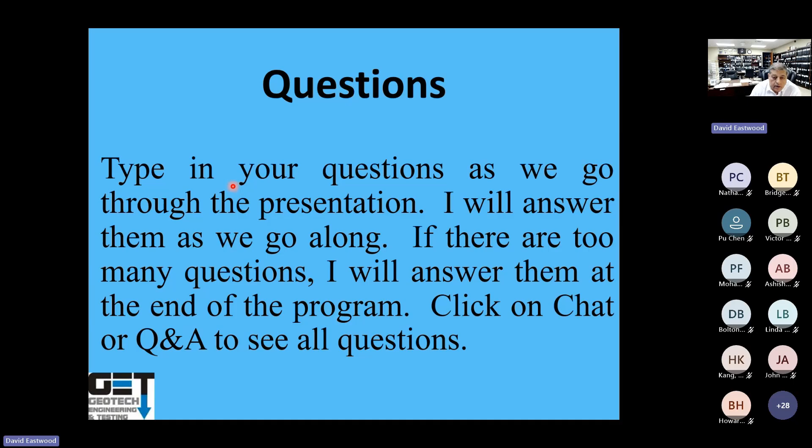This is the Willis site. We did the initial geotechnical for the pool and the rec center. We did recommendations for pool foundations, reviewed the plans and specifications, and did quality control for it. We did site visit, density testing, steel placement, and gunite testing here.

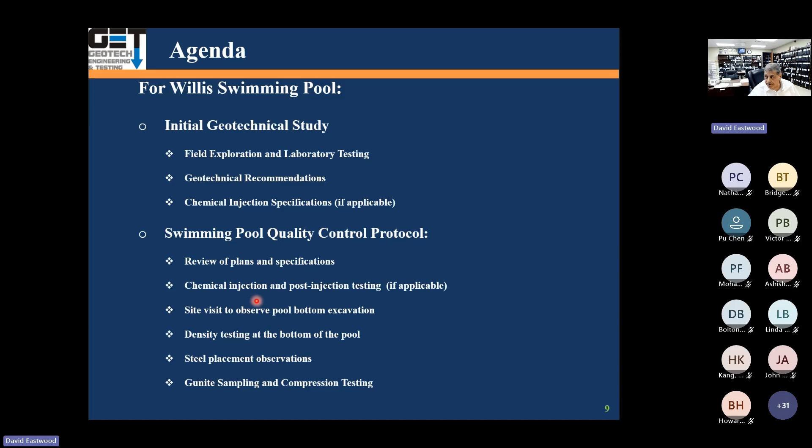There was no chemical injection on this site, but typically, if your soils are expansive, we do chemical injection and monitoring. The project is out there near Conroe.

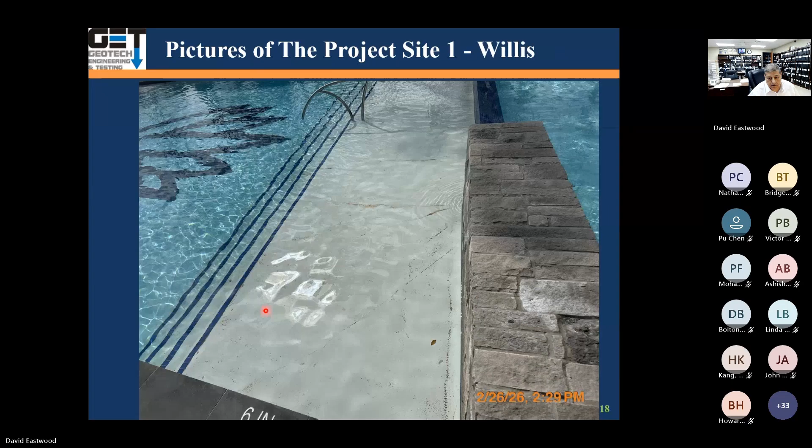Here's some pictures of the site. It's a nice rec center, but you can see cracks here, cracks in it, cracks right there.

So the pool has many cracks in the gunite. You can see them through the plaster. Here are the cracks.

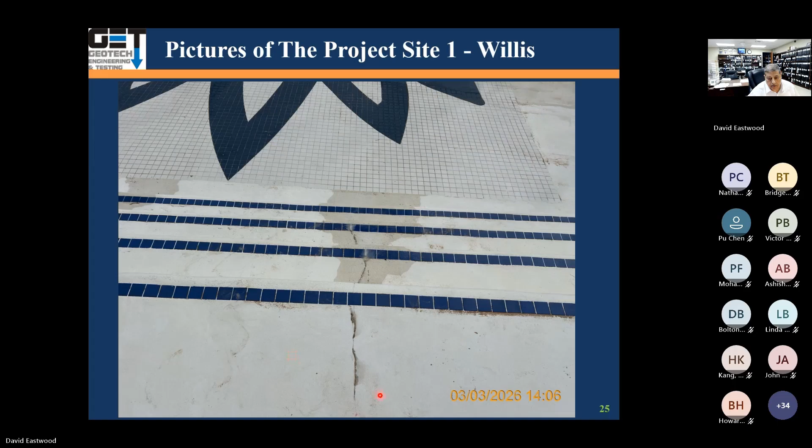So they had to empty the pool to check out the place, and they had to put these little holes in it to relieve the hydrostatic pressure at the bottom of the pool to reduce potential for uplift.

Geotechnical study, project site 1. We did the geotechnical study for this rec center and the pool. We checked the site conditions, did the plan of borings, and developed soil stratigraphy, groundwater table, and whether or not soils are expansive.

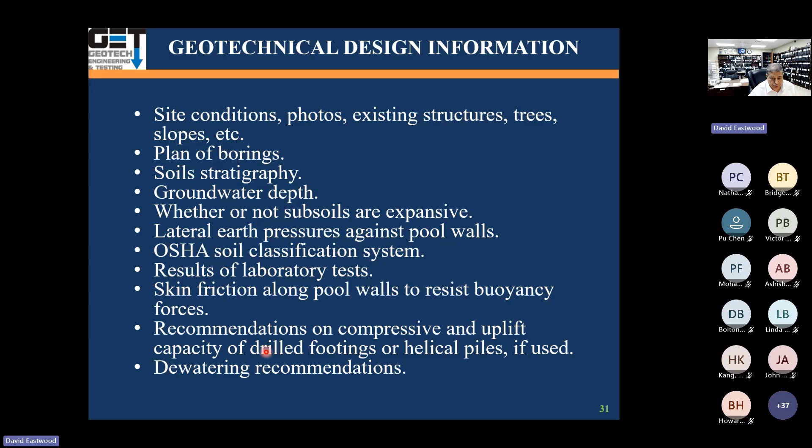We did lateral pressures for the pool, OSHA soil classifications for excavations, laboratory testing, skin friction along the pool, recommendation of compressive and uplift capacity of drill piers if they used it, dewatering recommendations, PVR at the deep end and shallow end - that's very important.

Edge moisture distance - how far moisture from the pool extends out, which affects shrink-swell problems - depth of movement active zone, depth of root fiber, whether there are trees near the pool, tree trunk diameters and species, recommendations on uplift capacities of the pool, recommendation on whether the excavated soils can be used as fill, consideration and maintenance programs, trees and drainage.

So these are some of the things that we looked at on this project.

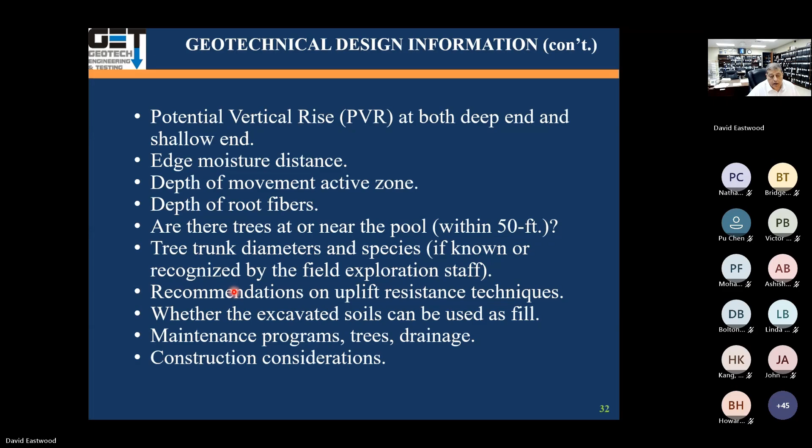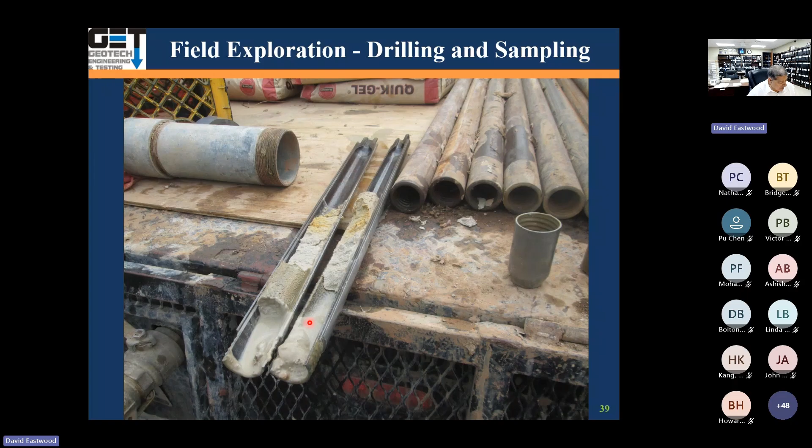The typical soils that come out, we extrude from the site. If the soils are sandy, that's a split spoon sampler. We test the soils for how strong they are based on the SPT values, standard penetration test.

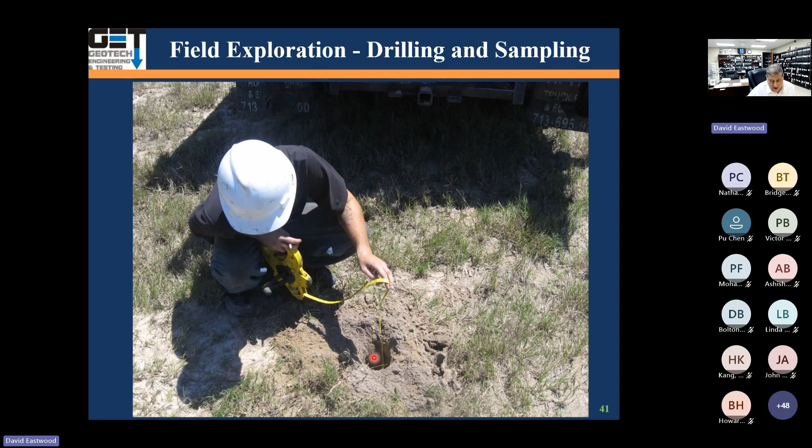We measure the water level with the tape measure with the weight at the end of it. We throw it in the hole. When it hits water, it tells us it goes plumb, so we know the water depth. It's not very accurate because water level changes all the time. If I go out there and check the water level right now, it's going to be deep. If they're going to build a pool in February, the water table is going to be shallow. So it's just an indication, not very accurate. Lab testing, we do the standard lab testing.

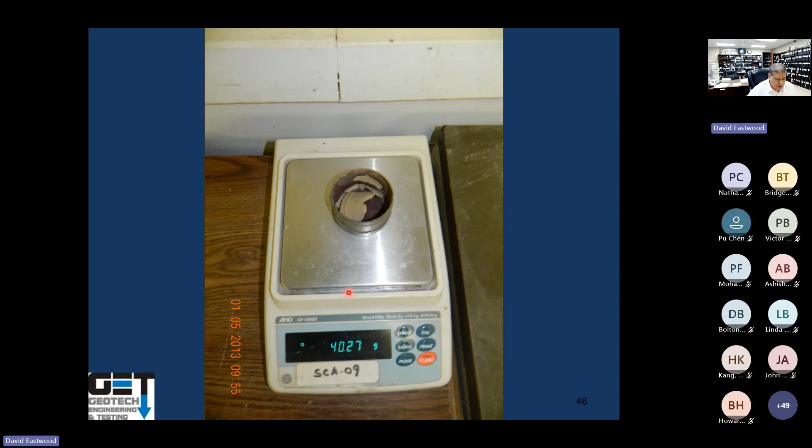I'll talk about them for a minute. It's a liquid limit test. In this test, we take the soil sample, add a lot of water to it until it becomes a liquid. We get a spatula, put a piece of it here, spread it, and cut a groove through it, then turn the handle 20 to 30 times. Once the groove comes together, we get a sample of the soil and weigh it to get the wet weight, then put it in the oven and dry it up to find out how much water is in the soil for it to behave liquid.

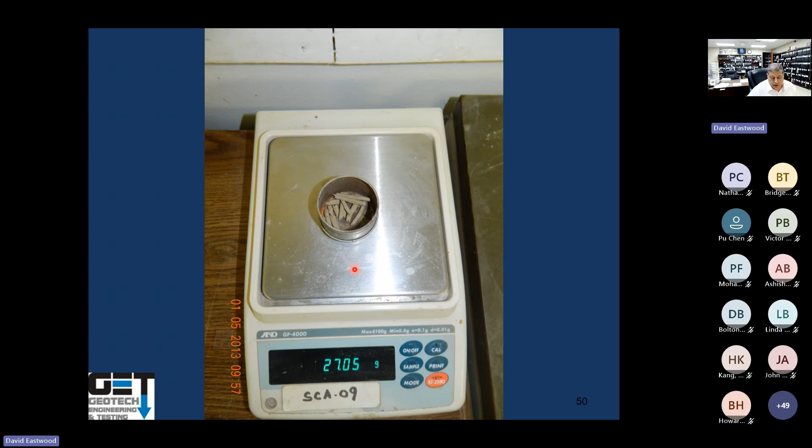Then we also run plastic limit tests. In this test, we take the soil sample and roll it to 1/8 of an inch to find out how much moisture is in the soil for it to behave semi-plastic. We get the wet weight of the soil, then put it in the oven and dry it up to get the dry weight, and subtract the dry weight from the wet weight to find out how much moisture is in the soil for it to behave semi-plastic. The difference between liquid and plastic limit moisture contents is called plasticity index, or PI.

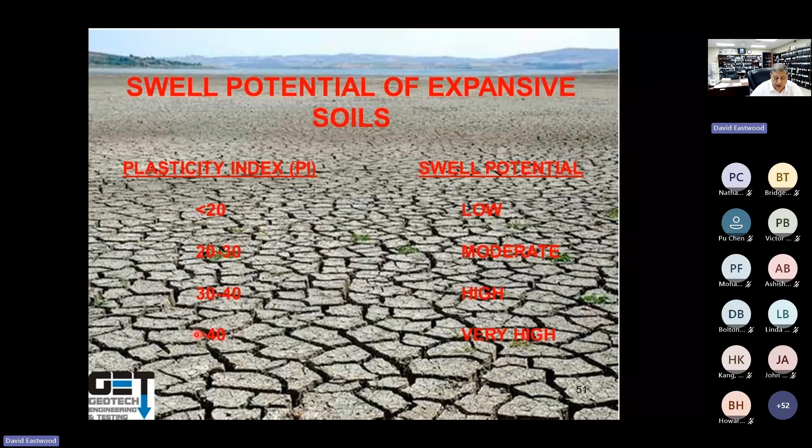If your PI is less than 20, you've got low swell potential. 20 to 30 is moderately expansive. 30 to 40 is highly expansive. Above 40 is very high. So places like Willis, you've got sandy soil, so it's got low swell potential. Places like Texas City have fat clays with PIs greater than 40, very highly expansive.

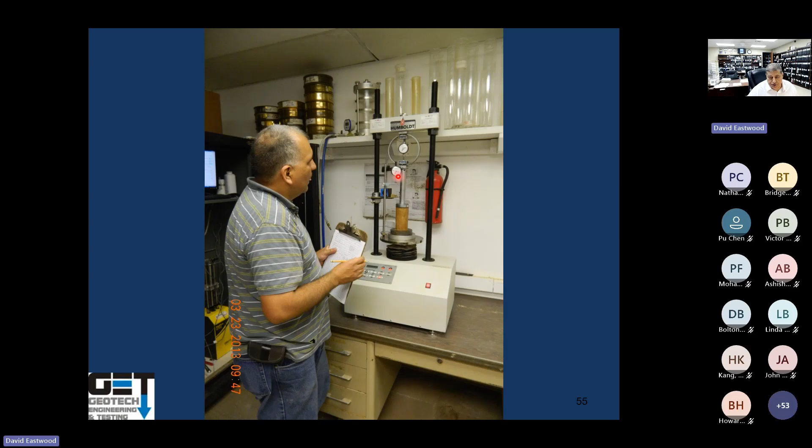A couple other tests we run are called hand penetrometer and torvane. With the hand penetrometer, you take the soil sample and push this thing in there, and you can read what kind of strength you have. With the torvane, you put it at the end of the sample, measure the torsion, and read what kind of strength it has. You also run an unconfined compression test, where you put the sample in here, and this is a proving ring. It deflects, you shear it, and see how much load the soil can carry.

That's important for design of the excavation for the pool, and if you've got any buildings out there, like a rec center, for the foundations, to know how much load it can carry. So this is the Willis site, boring logs from 0 to 6 feet. We had sand. Below that, they had lean clay with a PI of 22. Below 13 feet, we had fat clay. So that's not a bad site.

It's got sandy soils: silty sand 0 to 6 feet, 6 to 13 feet lean clay, 13 to 25 feet fat clay. PIs ranging about 22 here. So their soils are really loose near the surface. The silty sands are loose.

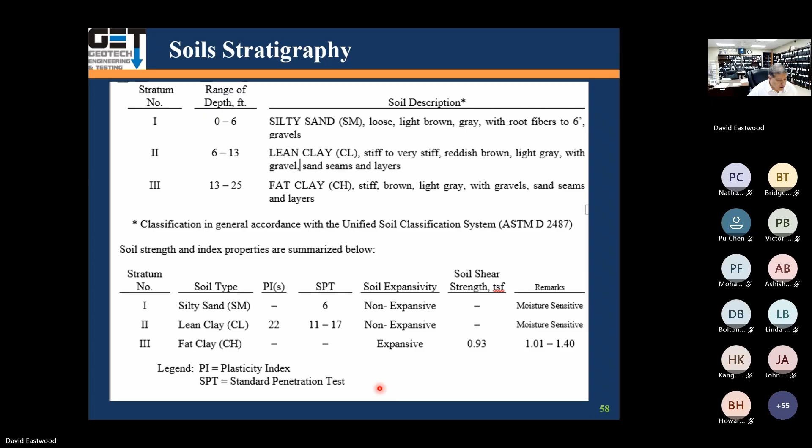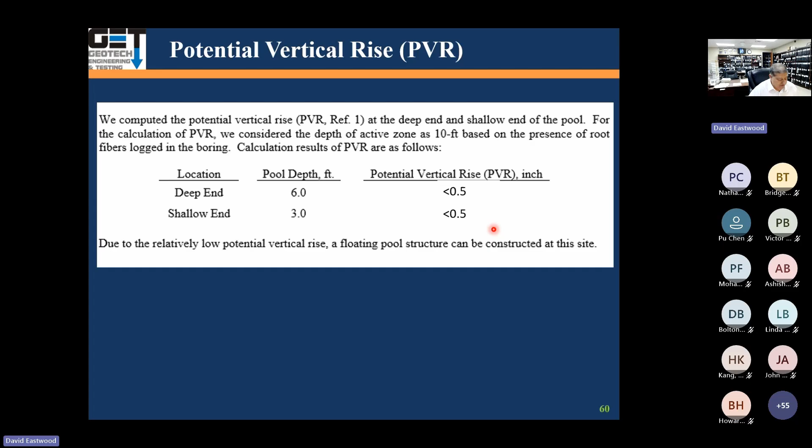Potential vertical rise, or PVR. Whenever you do pools, you always check the PVR on that site. It's expressed in inches and estimates how much swell, or heave, you're going to experience for a specific location. At this site, at the deep end of the pool, assuming a 6-foot pool depth, the PVR was less than half an inch. At the shallow end, 3 feet deep, also less than half an inch. Allowable pool movement is 0.5 inches. That's because after half an inch of pool movement, kids playing around the pool could trip over and hurt themselves, so we don't want the pool to move more than half an inch.

Site number 1, we reviewed the specifications, plans and specifications. We did a site visit to check the bottom of the excavation of the pool. We ran the density test after compaction of the bottom of the pool. We checked the steel placement and we tested gunite.

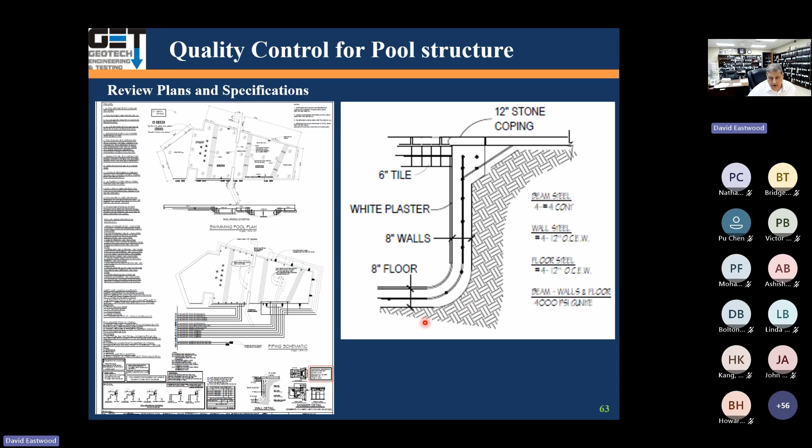There's a typical pool construction here. Got 8-inch thick gunite, and you got steel in there. Soils are sandy and lean clay, so there's no soil treatment required as long as the bottom is properly compacted. Gunite, in this case, is supposed to be designed for 4,000 psi.

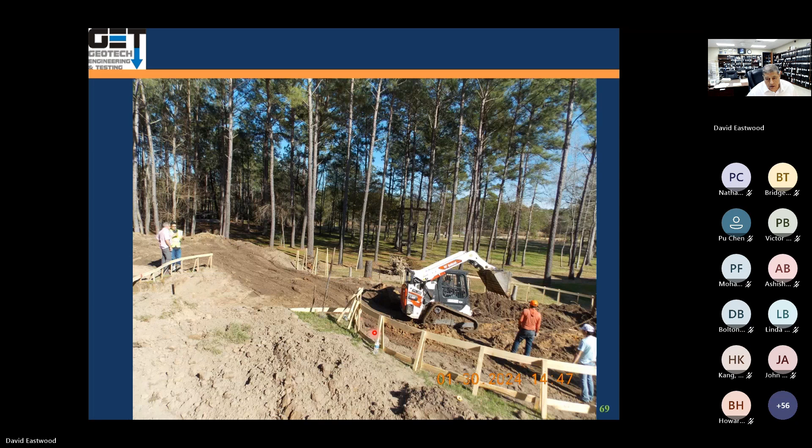Construction, they start excavating the pool. They just get a backhoe or something else. They just start excavating. This is the bottom. Doing the construction.

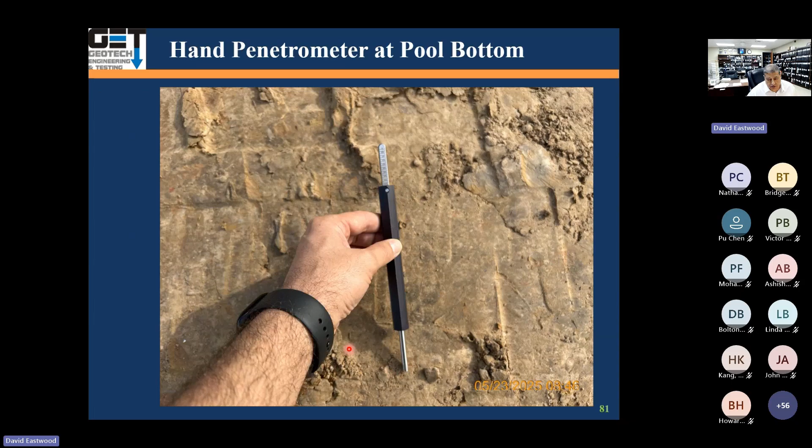We also ran hand penetrometer tests at the bottom of the pool. That's a hand penetrometer, and push it into the soil, get a strength. We usually like to have a strength of at least 2.0 TSF. On the hand penetrometer, it was 2.7 TSF, so the soils at the bottom of the pool were strong.

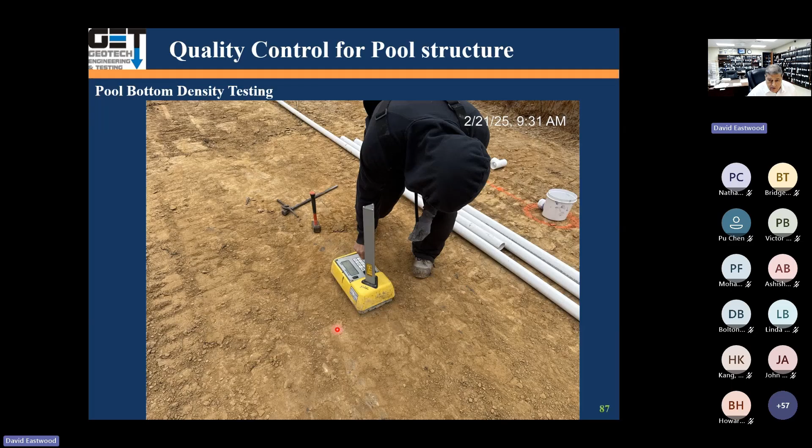So we run density tests. We check a proctor test on the bottom of the soil at the pool, to see what kind of proctor it has. That's the relationship between density and moisture of the soil. The dry maximum density here was 113.8. Optimal moisture was 15. These are the compaction tests at the bottom of the pool.

They ran it at 4 locations, and densities ran from 99.7 to 96%. Required compaction was 95% standard, so densities passed.

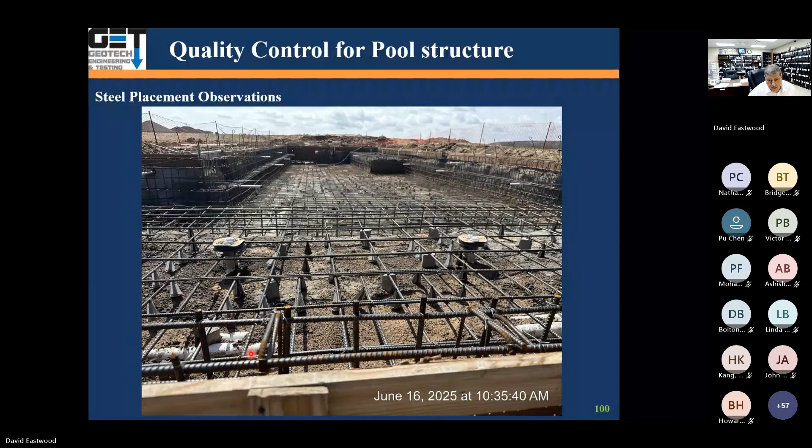Steel observations, we checked the steel placement for the bottom of the pool. They had these blocks in here. We told them to remove it and put plastic chairs. So we wanted the plastic chairs, not the blocks. We checked the steel placement, the size of the steel, the spacing, to make sure it meets project specifications.

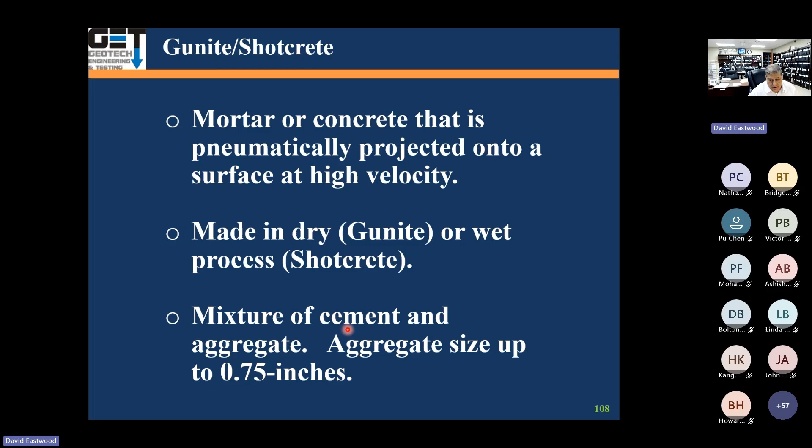Then we check the gunite. Of course, gunite is a mortar or concrete that's pneumatically projected onto a surface at high velocity. If it's mixed dry, it's called gunite; if it's wet mixed, pre-mixed, it's called shotcrete. It's a mixture of cement and aggregate, with aggregate size not greater than 0.75 inches.

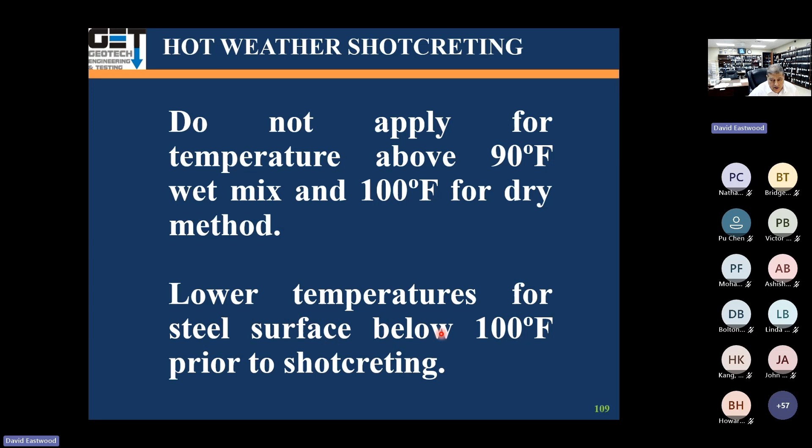Do not apply if the ambient temperature is above 90 degrees for wet mix, or 100 degrees for the dry method. Lower temperatures for the steel surface below 100 degrees before shooting gunite. Gunite may proceed if the ambient temperature is 40 degrees and rising, or 50 degrees for latex modified shotcrete. Do not start if the temperature is 40 degrees and falling. Shotcrete materials' temperature should not be less than 50 degrees or higher than 90. Shotcrete should not be placed against frozen surfaces. These are some general guidelines.

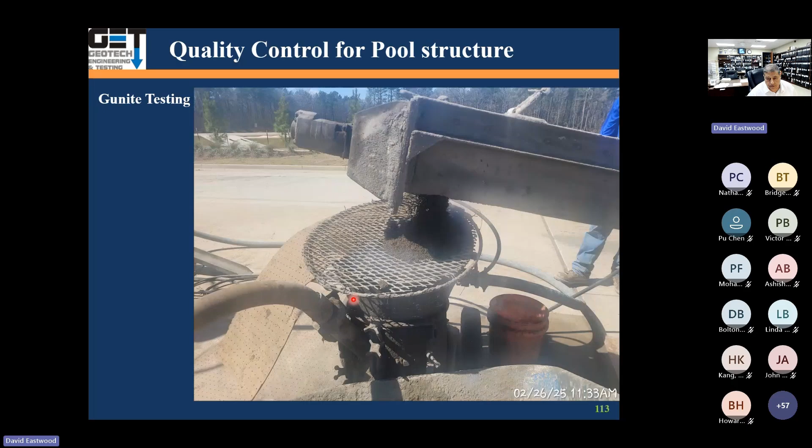That's the truck that mixes the gunite out there. They've got the cement and the aggregates. That's the gunite truck, see the material coming out. You've got a hose that comes in, and they start shooting it. You can see them shooting the gunite. Ideally, you want to shoot it at a 90-degree angle, not at a 45-degree angle.

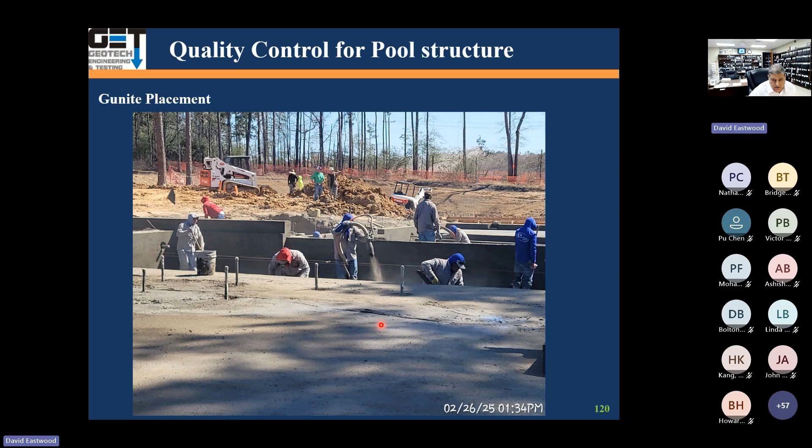Here they're shooting the gunite. Gunite panel preparation - we want to test the gunite. So what we did was get a wood panel, 3 feet by 3 feet, or 3 feet by 2 feet. ASTM has a standard on it. We shoot the gunite into it and let it cure for 14 days.

Gunite panels are equivalent to concrete cylinders used to evaluate compressive strength, of the concrete material, because shotcrete cannot be shot into a closed cylinder form - the shotcrete is shot into an open-faced form instead. Cores are taken from the panels and tested at appropriate age. Usually we test them at 14 days and 28 days, sometimes at 7 days. We go out there and core them, like 2-3 days after.

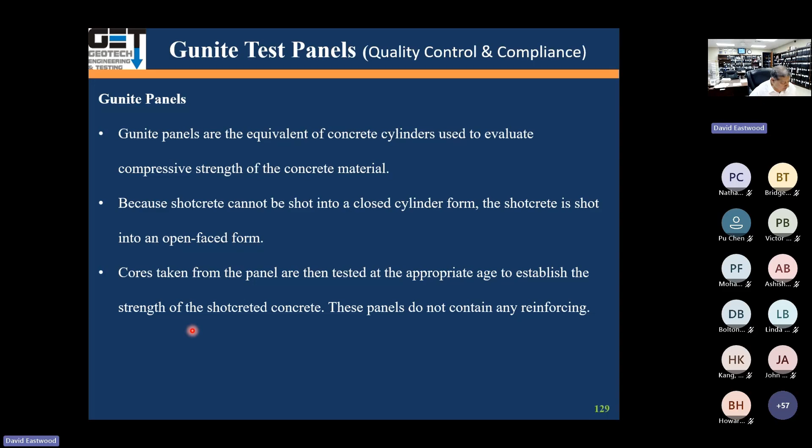No reinforcing should be in the panels. ASTM C1140 is the standard practice for preparing and testing specimens from shotcrete panels. It provides the testing requirements. The panels are samples of shotcrete sprayed into a form under controlled conditions.

Standard cores are later taken from the panels using a gunite panel coring machine. You go out there and start coring the panels, typically after 14 days. ASTM C1140 talks about how to do these things.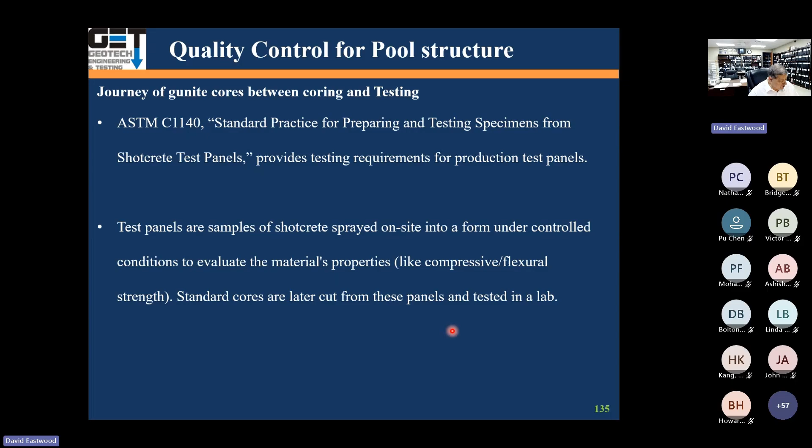Test panels of shotcrete are spread into a form, and they indicate how we go core them and take them to the lab. When we take them to the lab, we cut the ends of the core so that they have nice, clean ends, not jagged.

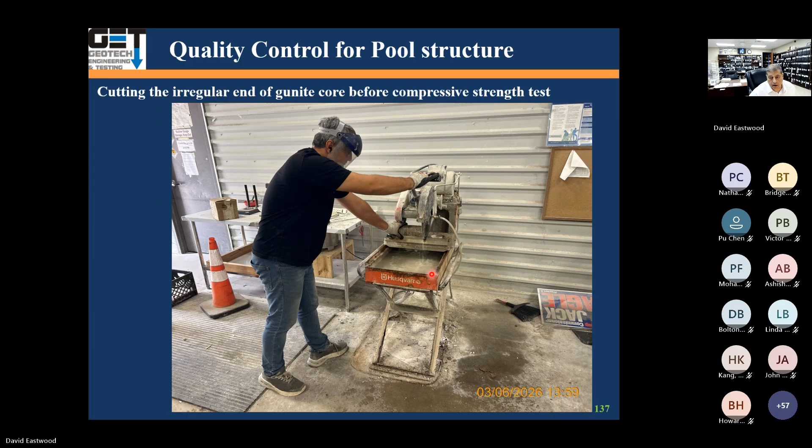You put them in a plastic bag and place them in the curing room for 5 days for basic moisture conditioning, to stabilize the moisture gradient throughout the cores. Then we test them after the 5 days of curing. You measure the cores, get their dimensions, run densities on them, cap them, put them in a machine, and break them.

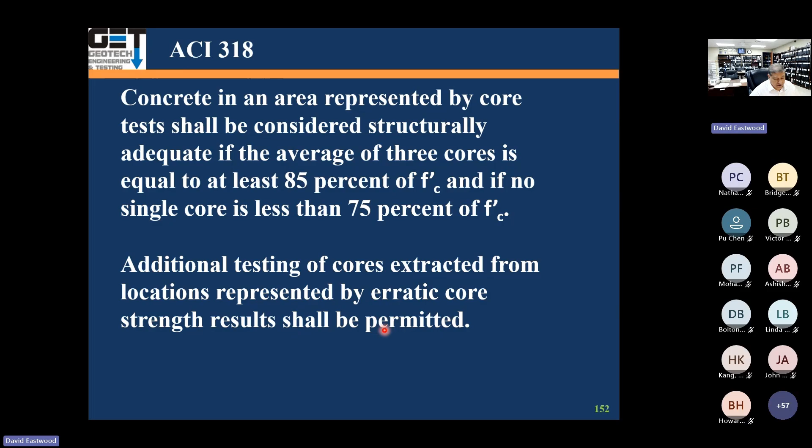The concrete area is represented by the cores, and that's how we determine if the cores passed. Typically for 3 cores, the average core strength should not be below 85% of the design strength of 4,000 psi, and no single core should drop below 75% of F'C. If it does, it typically fails or additional testing is required. For 4,000 psi gunite, 75% of F'C is 3,000 psi, and 85% of F'C is 3,400 psi.

When we read the testing at 7 days, we got strengths of 3,600 and 3,550 psi; at 28 days we got 3,888. So the gunite passes the strength requirement. It's not 4,000 psi, but it still passes.

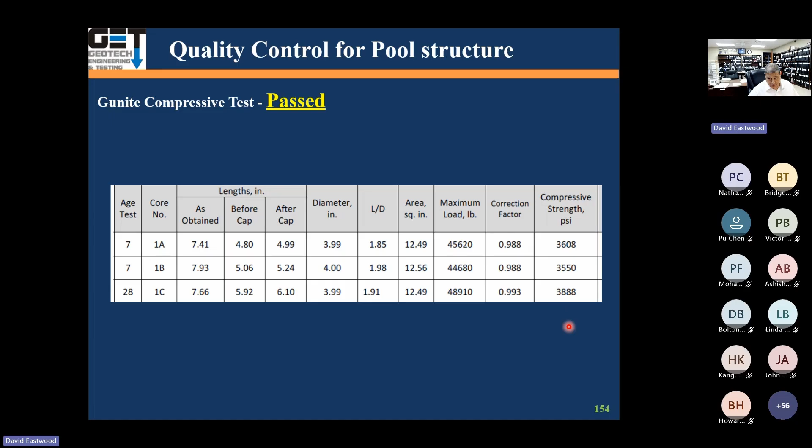When you put the pool together and shoot the gunite, you're supposed to go out there and cure it with moisture conditioning — add water to the surface, put burlap on it or something — to cure it for at least 14 days, maybe 28 days even better.

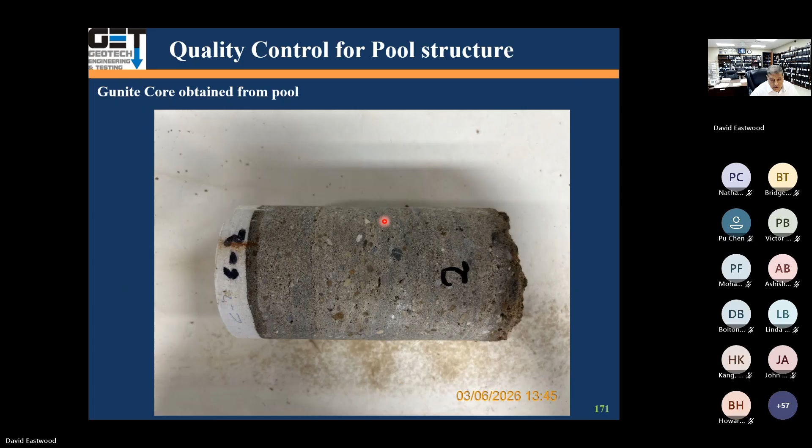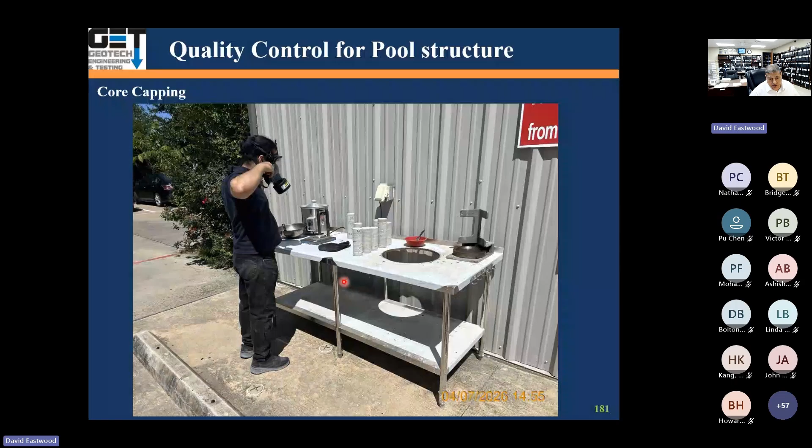We cut the ends of the cores, put them in the curing room for 5 days, measured the dimensions, capped them, and broke them in the compression machine. We got test results of 1,600, 1,500, 1,600, and 1,500 psi.

It was supposed to be 4,000 psi, and they all failed. Most of the reason why it failed was the large amount of voids in it, probably due to the way the gunite was applied. They had voids in it, and the mix couldn't have developed the 4,000 psi strength it was supposed to have.

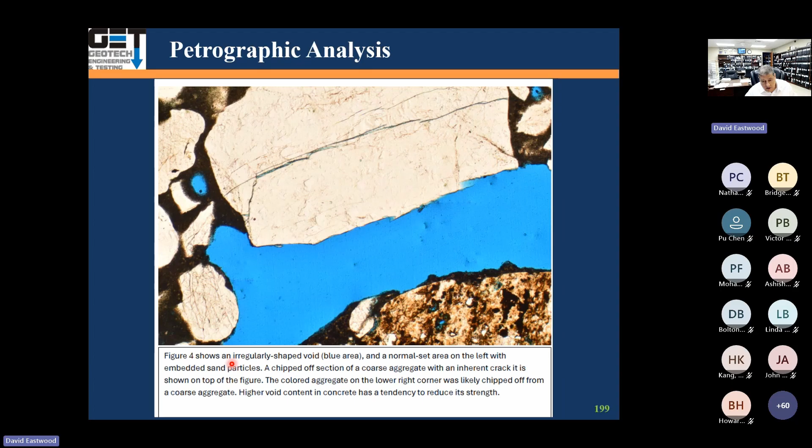They said they were basically going to keep it going for the summer. We also did a petrographic analysis of the gunite — we took a couple of cores, took a slice of the gunite, and put it under the microscope. We saw a lot of voids in there. We had a petrographic expert look at it, and he showed a bunch of voids in the gunite.

It also showed a lot of black, oily stuff in the gunite. The petrographic report said high voids were present in the gunite, resulting in lower compressive strengths. So when you have a lot of voids in your gunite, you're going to get low strength.

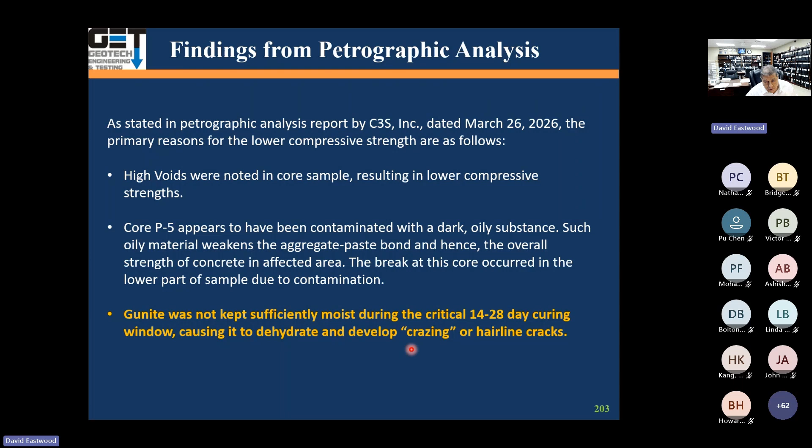One of the cores we did the petrographic analysis on had oily stuff in it — I don't know if they had some oil mixed in, but it caused problems with the gunite strength. He also thought the gunite was not cured properly during the initial 14 to 28 days, causing it to dehydrate and develop crazing or hairline cracks in the cores.

Based on a review of the compressive test results and petrographic analysis, the gunite does not meet project specification of 4,000 psi. We recommend the entire pool be removed and replaced. So what happens is they're going to remove the pool at the end of this season and put a new pool in there with new gunite. So that's what happened to this one.

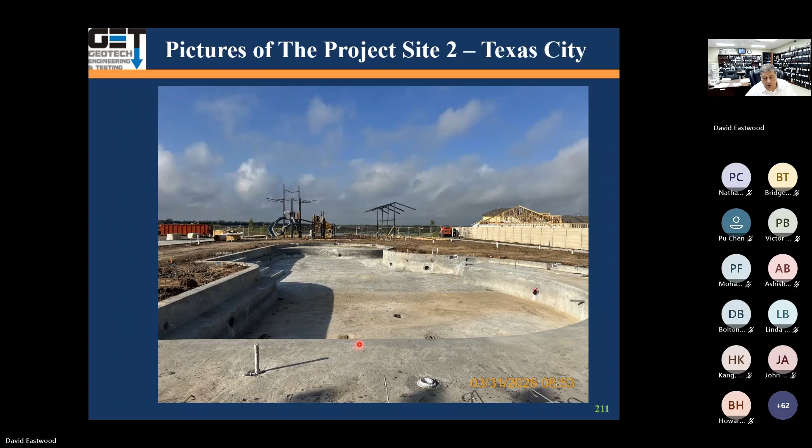Texas City site, you got gumbo clay soil in here. It's supposed to be really fat gumbo clay. They went out there, and that's the pictures of the pool. We did the initial geotechnical study for it, field exploration, geotechnical recommendation.

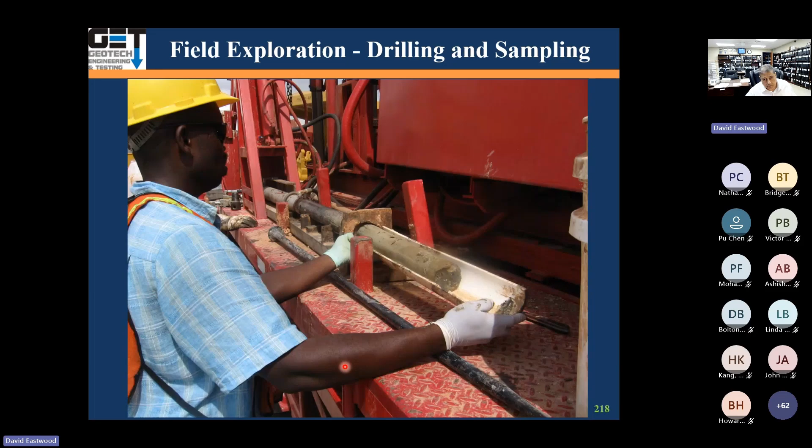Chemical injection specification. We did quality control, reviewed the plans, chemical injection observations and post-injection testing. We did site visits to observe pool bottom excavation, density testing at the bottom of the pool, steel placement, gunite testing. We did geotechnical work for the pool, and fat clay soils were present at the job site.

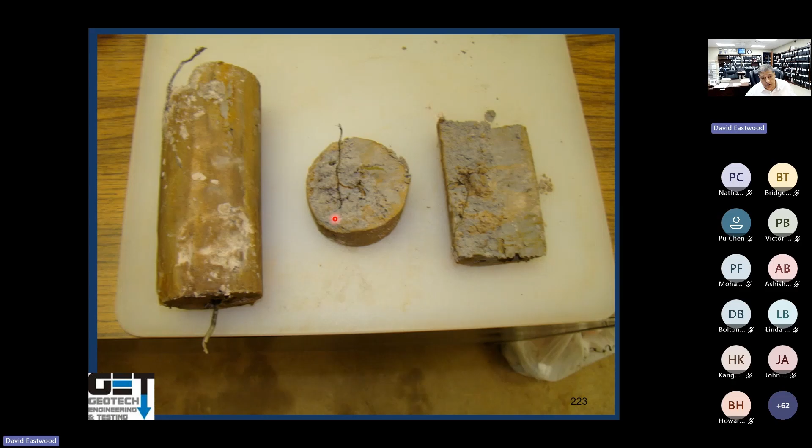Cut the end of it, put it in foil, put it in a box like this, a wax box. Check for root fibers. That tells us the depth of movement, the active zone in expansive soils.

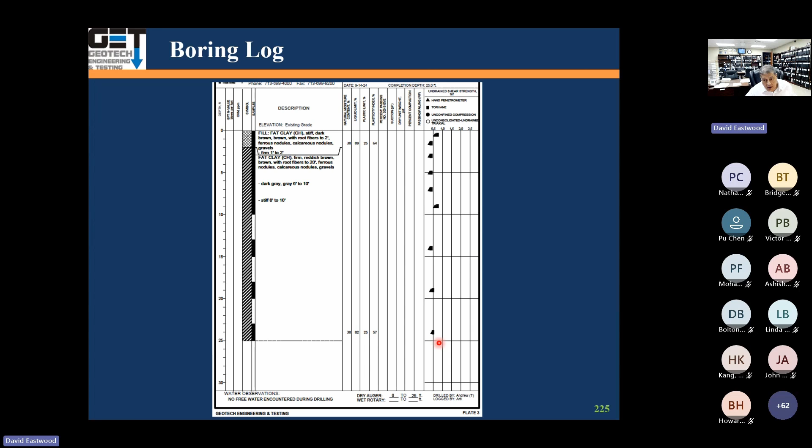This one is 6 to 8, that one is 4 to 6. Typically the movement active zone was 10 feet. That's the soil, fat clay, fill 2 feet of it. Below that you got fat clay. You got a PI of 64, PI of 57. The soil is 1,000 PSF, not very strong, but that's good enough to build a pool in it.

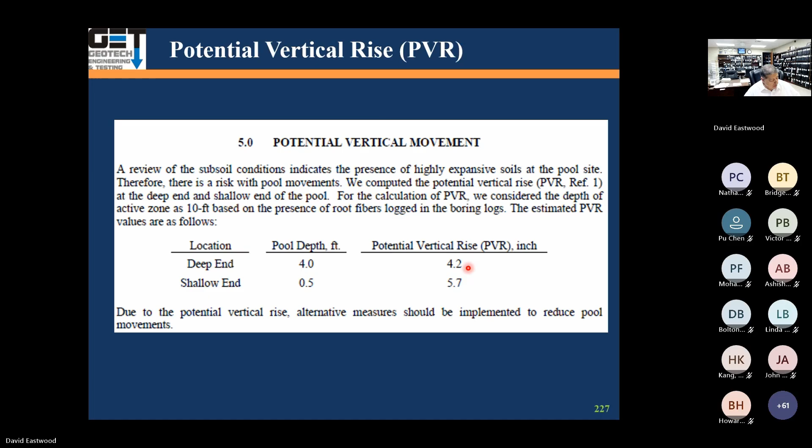At the deep end, we had a 4-foot deep pool at 4.2 inches of movement. Shallow end, 6 inches deep pool, potential movement of 5.7 inches. Well, this is not acceptable. We don't want the pool to have movement more than half an inch, so we cannot have more than half an inch of movement.

We develop what's called chemical injection specifications. It says you've got to go and inject chemical injections all the way to a depth of 10 feet. An average swell should not exceed 0.5%. So inject in the top 10 feet, not more than, well actually, 0.4%.

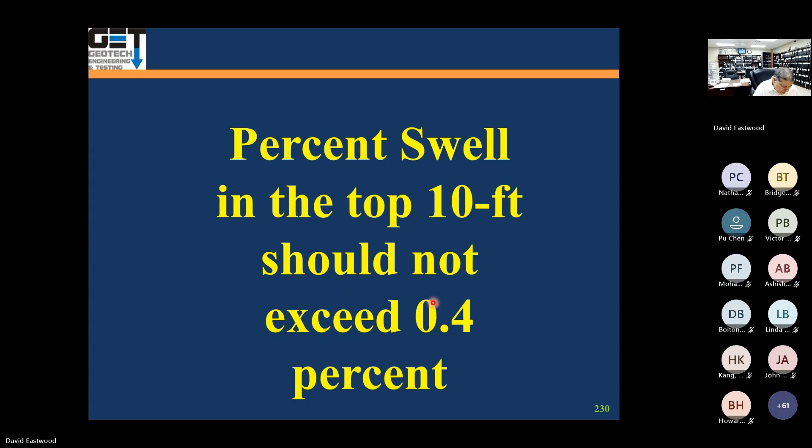We reviewed the plans and specifications, observed chemical injection. We did geotechnical boring to make sure chemical injection was effective. We did site visits to observe pool bottom excavation, density testing at the bottom of the pool, steel placement, gunite sampling. The gunite mix design for it specified 4,000 PSI gunite at 28 days.

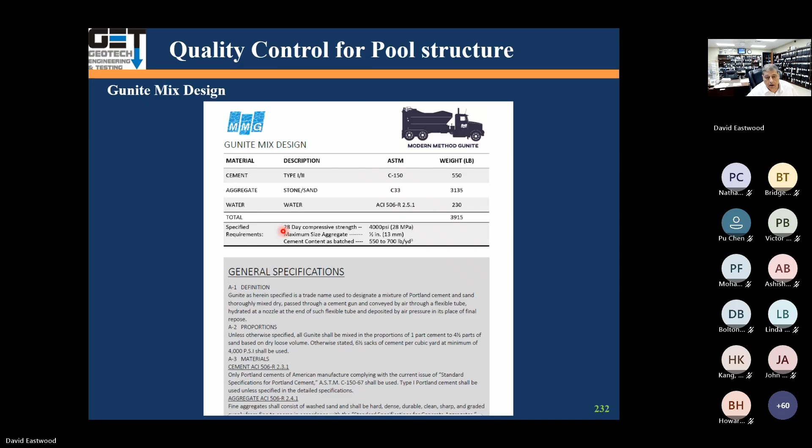So these are kind of like specifications. They talk about the thickness of the concrete on the walls and steel placement. Basically it says follow the geotechnical report.

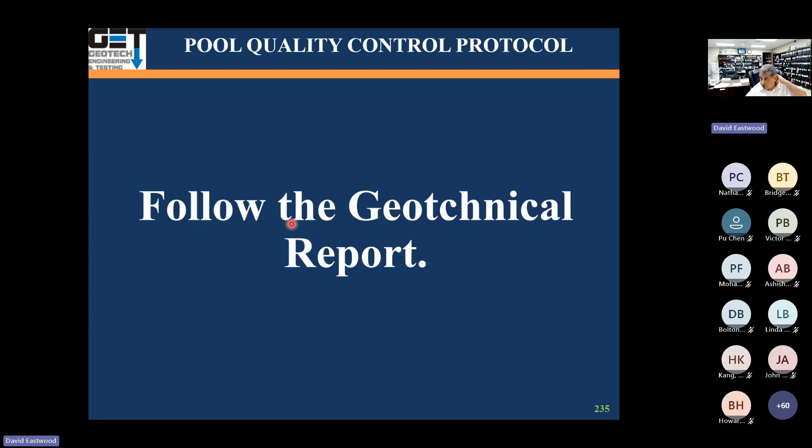Chemical injections: if your soils are highly expansive and you want to reduce the movement, you do chemical injection. This is a clay plate that's got a negative charge on it. Water has a positive charge, so it wants to absorb water. As it does, it expands and moves up. So what we do is reduce the negative charge so it doesn't absorb as much water, so it will not expand.

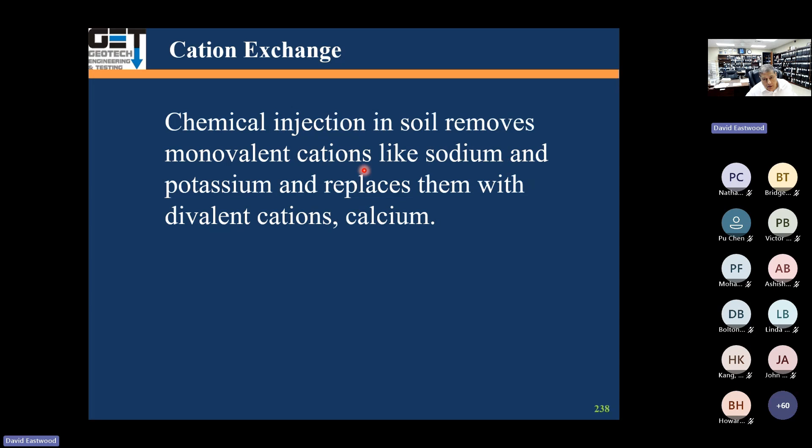Basically it's called cation exchange. It's just in soil that removes the monovalent cations like sodium and potassium, and replaces them with divalent cations like calcium.

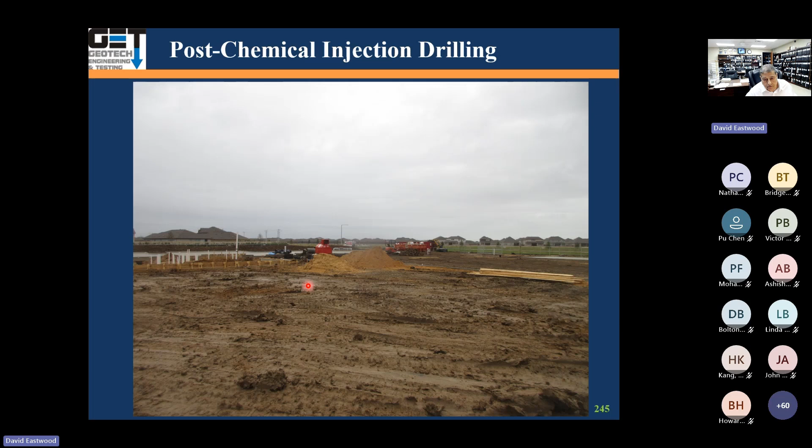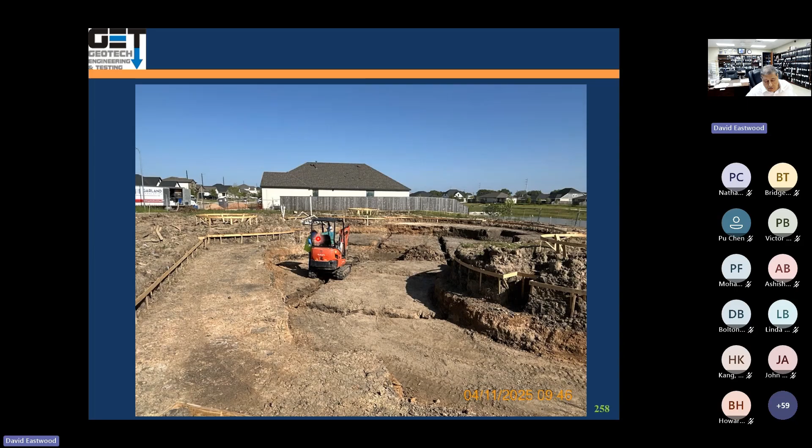Construction, pool excavation: after the chemical injection, we went out there and passed the chemical injection. They start excavating the pool. We check the pool bottom. It starts raining and gets wet, so they start pumping the water out and they put a bunch of lime in it to dry it up.

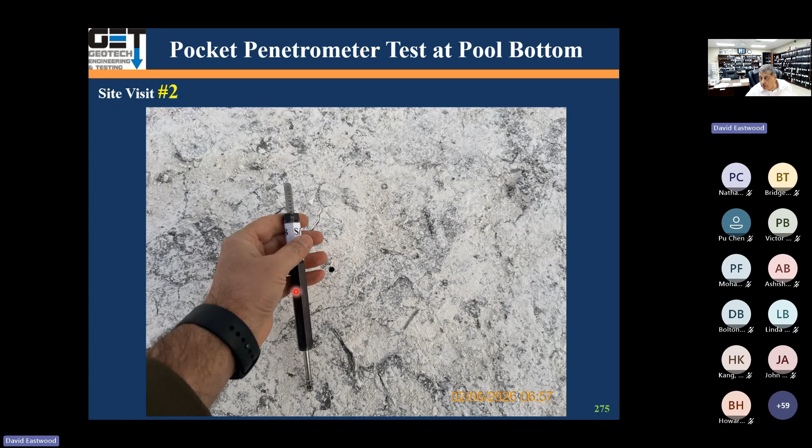We did a pocket penetrometer test to make sure the bottom was strong. The pocket penetrometer test showed 2.5 TSF, which means the strength of the bottom of the pool is good.

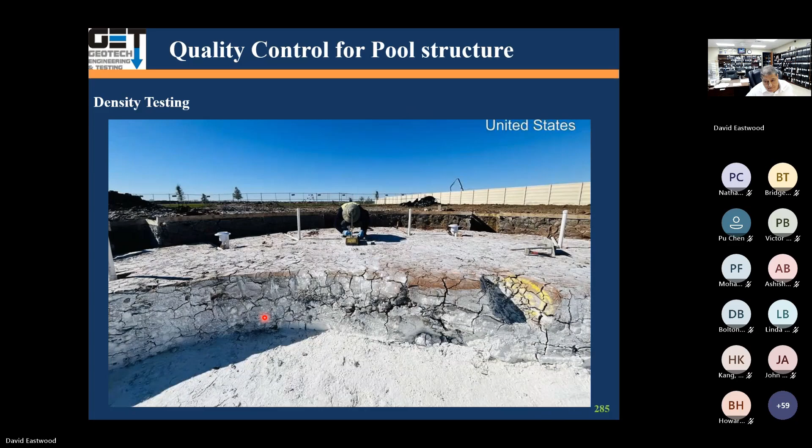We also ran density tests with a nuclear gauge. See, the clay is cracked up, it's going to dry it out.

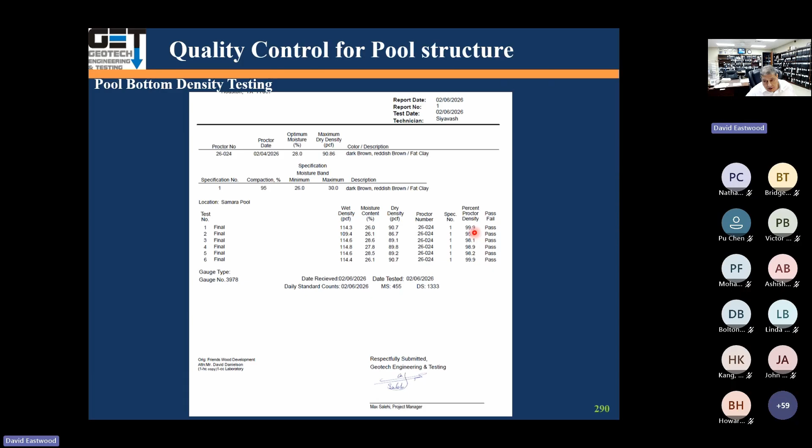This is the Proctor curve, showing optimum maximum dry density of 91, optimal moisture content 28. We ran 6 density tests, and they ranged from 98.1 to 99.9. So now the bottom of the pool is nice and hard, density passed.

Then they started placing the steel. We checked the steel spacing and placement. Again, we tell them to use plastic chairs.

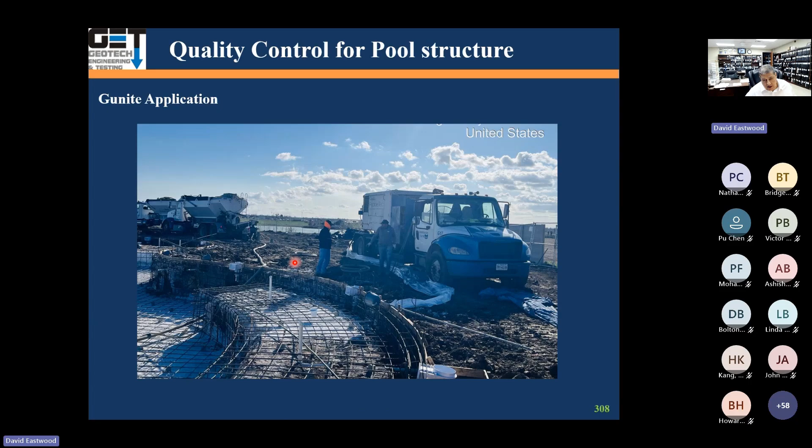They brought in the gunite, supposed to be 4,000 PSI. That's the gunite truck, starting to pump the gunite. Again, that's dry cement and aggregate.

They add water to it at the nozzle. So they shoot it onto the ground and it becomes gunite. See the valve here? They add water to the cement and aggregate.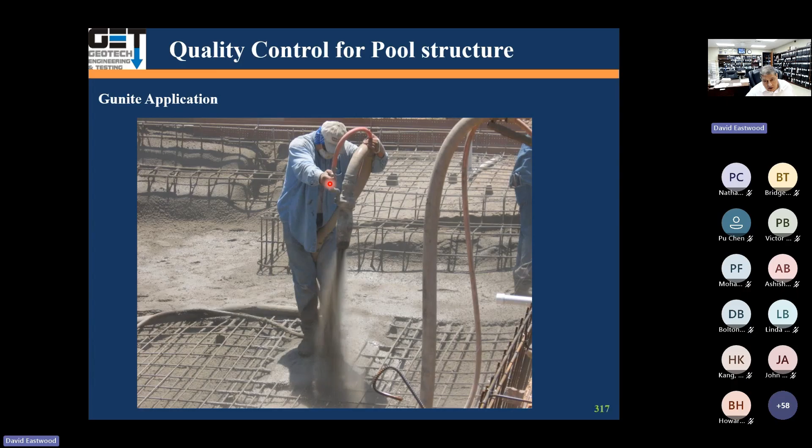Gunite panel testing. That's a typical panel. They start shooting the gunite into it. That's the panel, you let it sit there.

Typically, we core it after 14 days, or maybe 2, just depends when we need the test results. We start coring it. These are the cores.

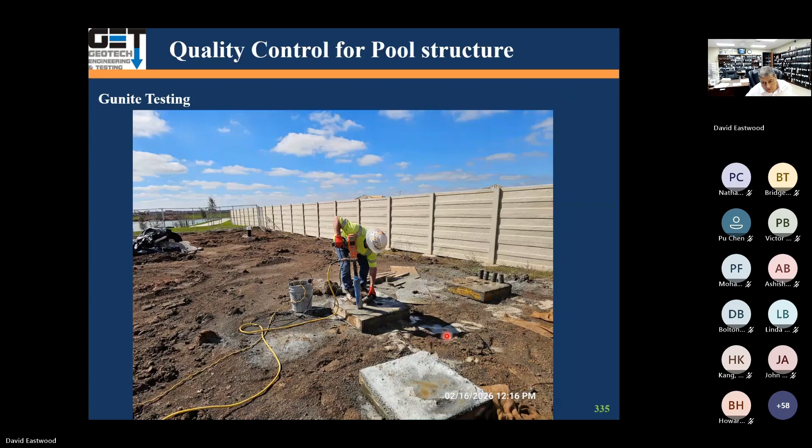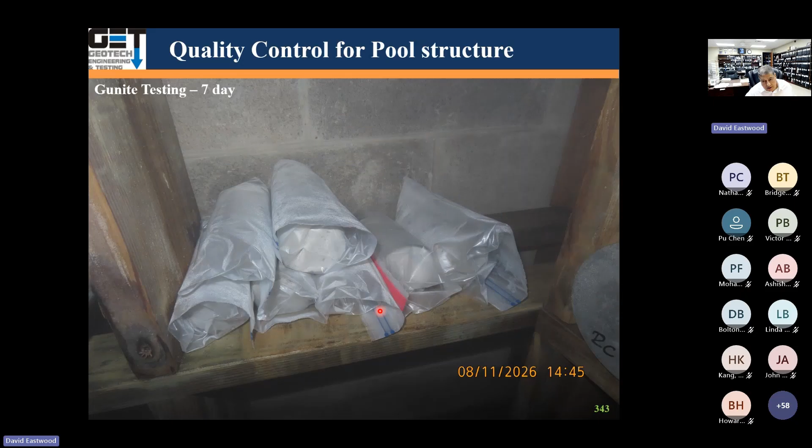We cut the ends of them, make them nice, put them in the curing room, let them cure for 7 days, measure the dimensions, cap them, then break them.

At the 7-day tests, we got these numbers. Everything failed. It's supposed to be 4,000 PSI at 28 days, so at 7 days I'm looking for a lot more than these values. 70% of that is 2,800 PSI. None of these are close to 2,800 PSI.

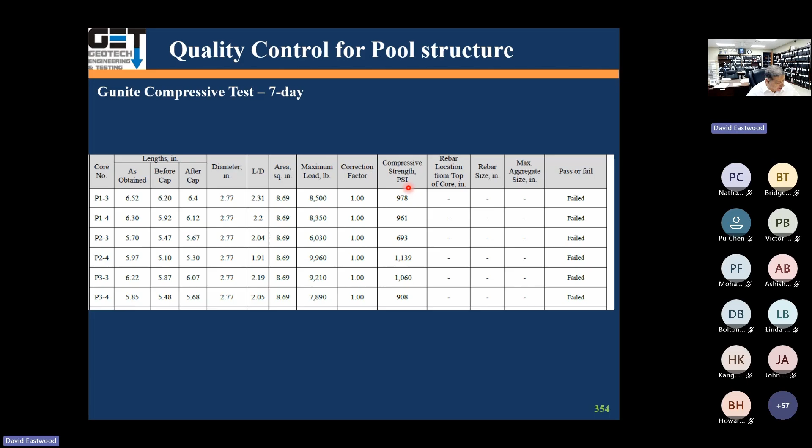We kept the cores for 28 days. These are the cores, we break them at 28 days. The strengths are 1,600, 1,200, 1,100, 831. All of them fail.

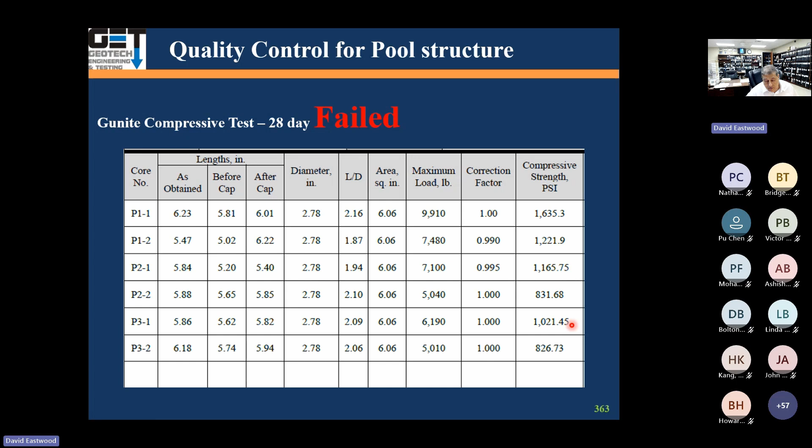Since the panel cores failed, we decided to go to in situ coring. So we went out there and cored the actual pool.

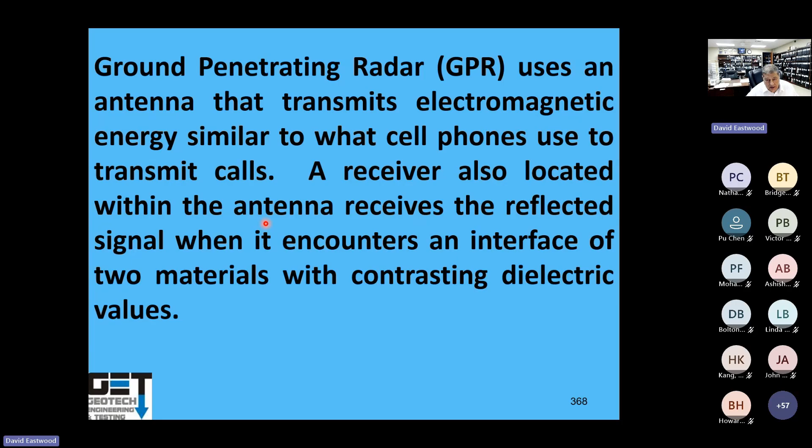So we did GPR before coring, with ground penetrating radar. Ground penetrating radar uses an antenna that transmits electromagnetic energy, like a cell phone. There's a receiver in the antenna that receives the reflected signal.

With the GPR, we try to make sure we don't hit any steel. So we run it and find places where there's no steel in the gunite. That's the GPR machine.

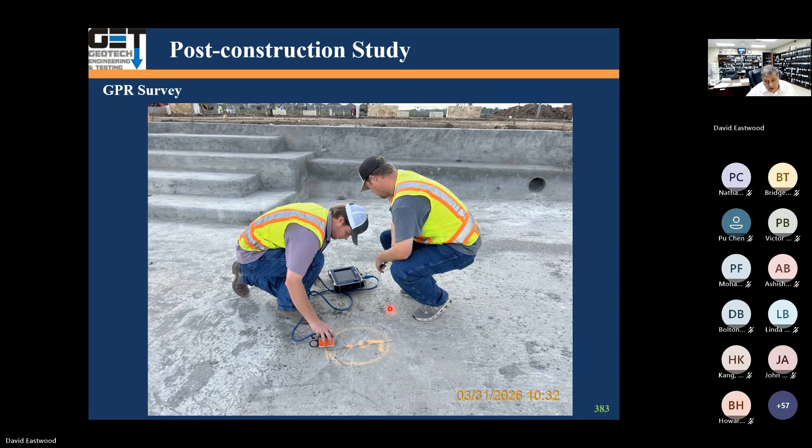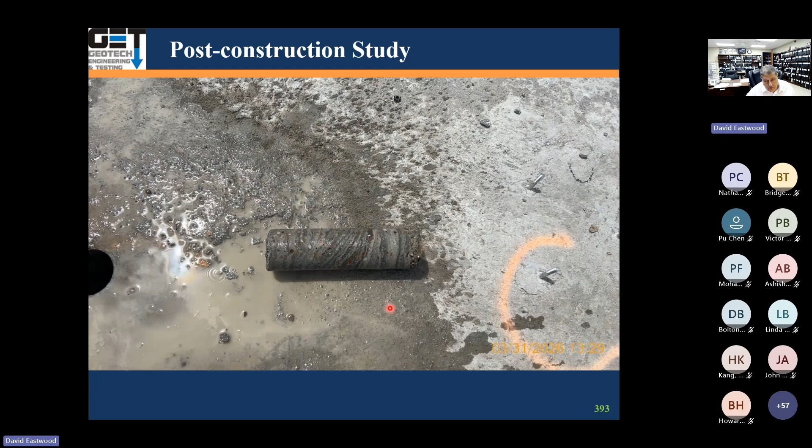And we start coring it at those locations. These are the cores. We cored out there on the side too.

We see voids in the gunite. Again, voids in the gunite.

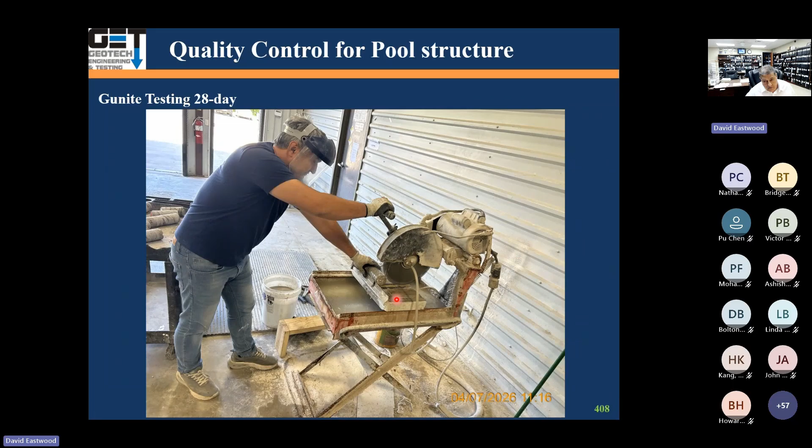These are the cores, we cut the ends, cure them for 5 days, measure the dimensions, cap them, break them.

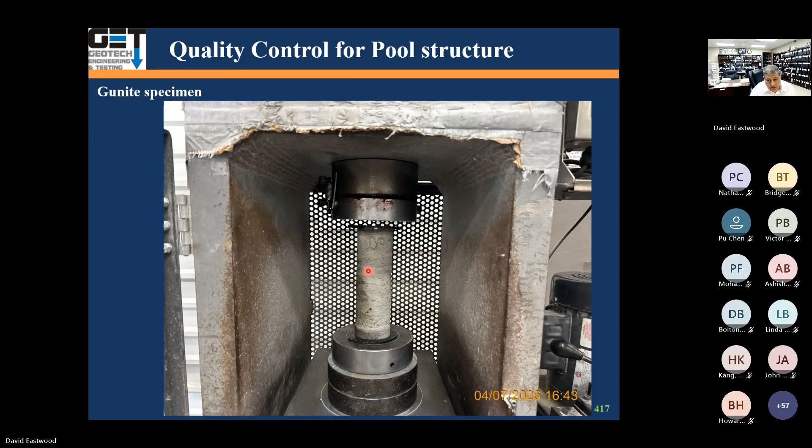The cores break. The strengths range from 2,000, 1,500, 3,400, 2,400, 3,200. These are the in situ cores from the pool. All failed.

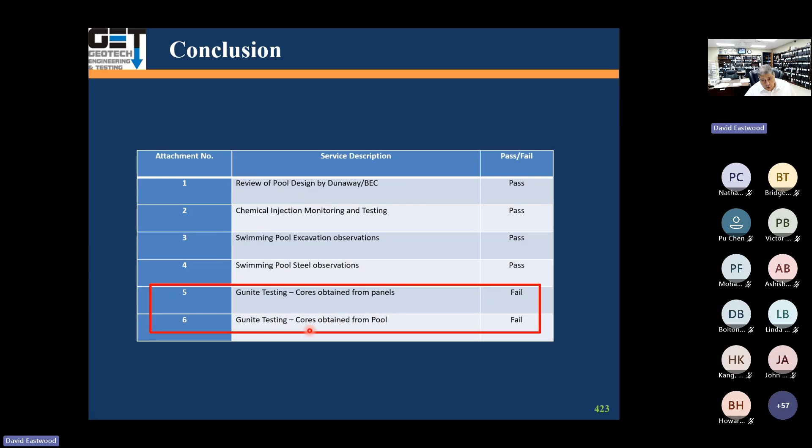So we did a review of the pool design. We do chemical injection monitoring, swimming pool excavation observation, swimming pool steel placement, gunite testing of the cores - the panels failed, and the gunite cores from the actual pool failed.

So that's a problem. Based on review of the compressive test results, it's our opinion that the gunite does not meet the pool project specification. The entire pool should be removed, or the area should be recompacted, and we need to go ahead and install a new pool.

For the new pool, we need to wet cure it for at least 14 days, maybe 28 days, to make sure it gets cured properly. It is vital to the overall strength of the gunite for it to cure properly.

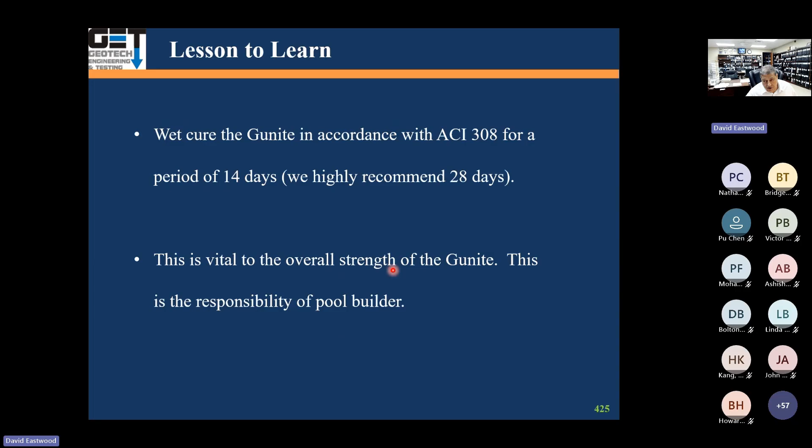So that's it, we had 2 sites with bad gunite. If you all see pictures of pools with a bunch of cracks, send them to me, I use them for presentations - pictures of anything interesting.